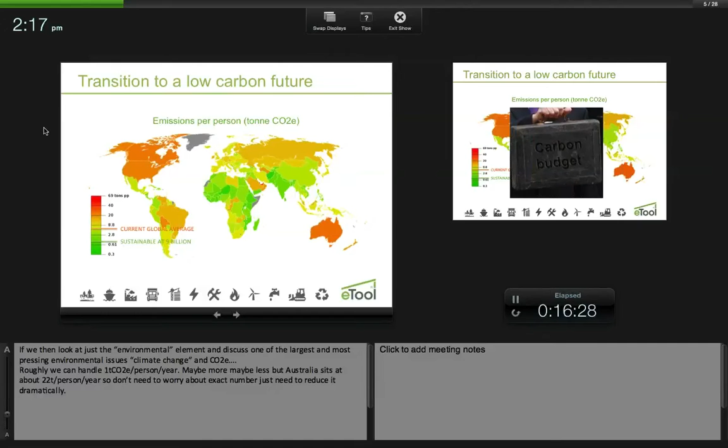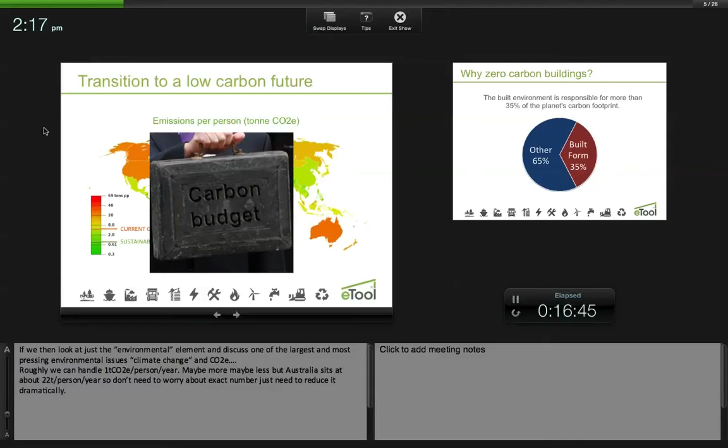So the biggest issue we've got at the moment is climate change, obviously the most important one - that's why eTool exists, and that's what we're trying to solve. We look at this global map of emissions per person per year, and we see Australia as one of the top emitters per person in the world, at around 20 to 25 tons. We need to bring it right down to at least 1 ton per person per year to achieve a sustainable level. That's a drastic change - there's a lot of things to change, and we have a budget. We have to be careful with what we are designing and how we're living our lives in general. But we need to find ways and metrics to quantify these things and make sure we are following that budget that we've got.

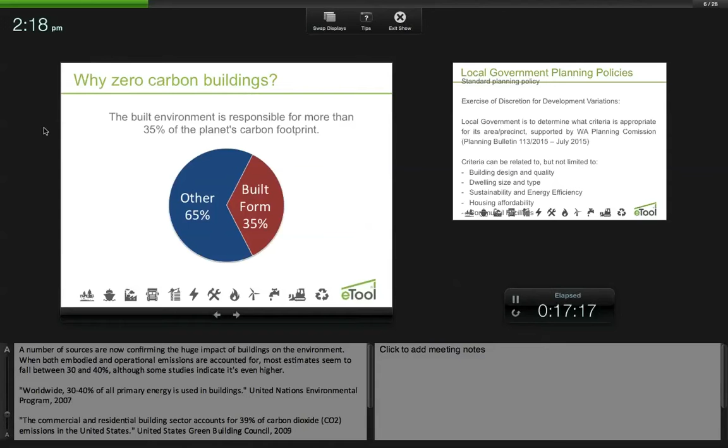And of course buildings are really important - that's why low carbon buildings, or even better, zero carbon buildings, are the way to go. Usually 35% of the impacts are associated with the built form. So there's a huge opportunity for us, as designers, as consultants, as planning officers, to help solve this issue.

Local governments have been using planning policies as part of a standard planning policy, as well as part of the exercise for variation to developments. So for example, City of Canning is looking at adopting life cycle methodology as part of their standard policy for development approvals. But they also have sustainability requirements when they're giving a density bonus, for example, when it's exercised for discretion of variation.

Apologies, this slide is out of format here, but there's a recent bulletin issued by the Planning Commission - I don't know if everyone saw it. It's just the WA Planning Commission supporting local governments to have their own policies and criteria to achieve good building design, and the criteria could vary from quality of the design, the type of the dwelling, sustainability and energy efficiency - one of the criteria, the focus we're talking about here today. So this is something that's happening a lot at the moment.

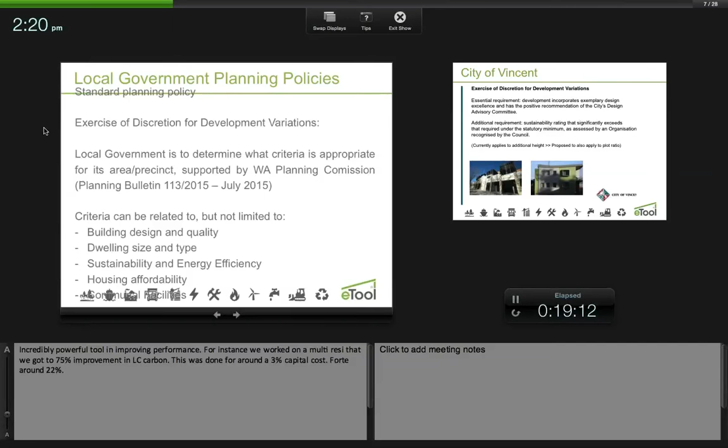So I use an example here from City of Vincent, from one of Anita's presentation slides. They mention a sustainability requirement to achieve the density bonus. A development going for an extra story or two will have to meet certain criteria in terms of different design principles, one of them being sustainability and design quality. City of Vincent requires that the design significantly exceeds the statutory minimum, and that's recognized by the council.

So each local government will have its own criteria and policies. They're also planning to expand it not only to additional height, but also to plot ratio. So it's something that's been working - they've been getting good outcomes with developers and with the community, so they're adopting that further.

Another example is the City of Melville for the Canning Bridge. The new structure plan is a notable area. They're requiring the multi-residential developments to achieve 6-star Green Star equivalent rating or equivalent. So it's very difficult - I don't think we have a 6-star residential building in Australia. We've got one 4-star in WA.

So it's something that the councils use - Green Star - because it's already a standard that's been out there. It works, but sometimes there's a lot of difficulties to implement that system, and developers will have barriers to achieve that compliance. So what we found is that the life cycle methodology has really suited that gap, or it's good support for this requirement.

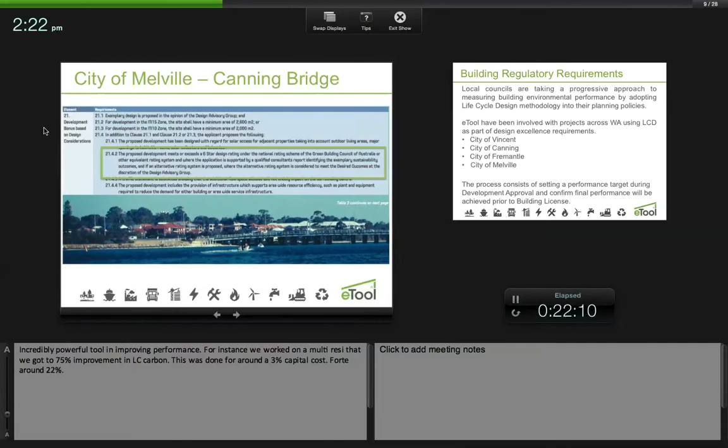Especially for example the City of Melville, we used life cycle methodology as part of the equivalency to Green Star. So it's one option that the council is looking at, but they have to understand how it works, how it compares. Are we really getting good buildings? How green is this building that we're proposing? So it's all part of that education process, and everyone is adopting more and more of this methodology.

The City of Vincent has been really progressive with adopting life cycle design methodology. They've used it on various - probably over 10 of their developments have been assessed through this methodology. It's not something proprietary from eTool, it's just a methodology. Any life cycle practitioner can conduct this assessment - that's the important thing about it as well.

So other councils have been looking at it as well - City of Canning, City of Fremantle and City of Melville. The process consists of setting a performance target right at the beginning of the project. Developers approach the life cycle assessment practitioner and say, we have a development here that's going for discretion or variation, and we need to prove this is a good building. Can you help us out? The earlier we get involved, the better, to set a target.

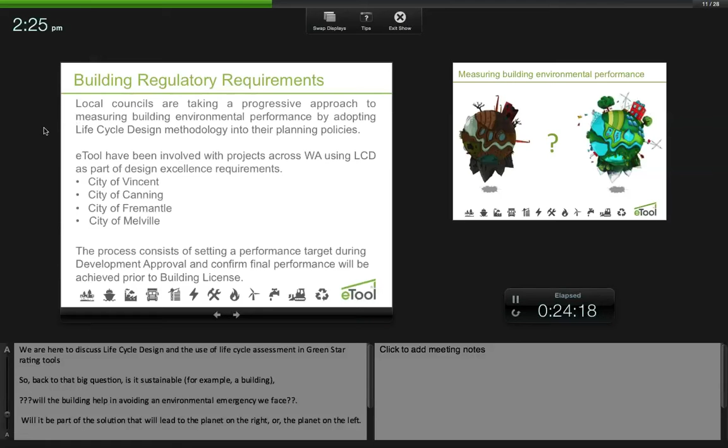Usually a council will have a target of what is a good building for them, how much they're expecting to save in terms of carbon emissions for that specific area. Is it totally, completely carbon neutral? That's what we hope, that's what we work for, but there are implications with that. So they'll set a target, for example, 60% better than the current benchmark. Once the council has defined that target, we'll then run a preliminary assessment and say how well this building rates, prior to DA, and then we'll work through the detailed design to make sure the building will achieve that target.

So that's the process. We'll look at the process in a bit more detail along the presentation.

Question - so you've gone through that process with those 4 councils. Have they all been relatively consistent in what they've deemed to be the equivalents? It varies - yeah, they all have different requirements depending on the region.

For example, the City of Vincent, they've set the target to be 50%, just one specific target. City of Canning, they will vary - it's still work in progress, it hasn't been defined yet. The City of Vincent is the one we have most work with, so the other ones are still work in progress. But it will vary depending on the region and depending on the criteria they have. It's a real learning experience.

Obviously we go in on behalf of - it might sound a bit wanky, but we go on behalf of the planet, so we're pushing the zero carbon outcomes. When we talk to a council, we're unashamedly saying, look, this is what we'd like you to do. The council says that's great, but the developer is going to walk away from building in this area if you push that hard - what's a reasonable figure to push for? Then you start bargaining to a certain degree. What we try to do is work on the developer side as well and say, look, this isn't about trying to hit that minimum target.

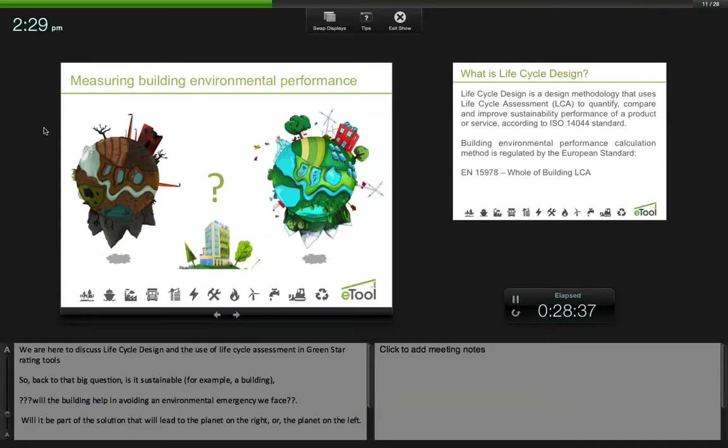It will depend on the specific situation, but we have metrics to quantify these things and look at how buildings perform, especially on environmental performance and looking at carbon. That's what we focus on here. We have other environmental indicators as well - when we run the assessments, you can look at different impact indicators like toxicity, land use, eutrophication, or depletion of the ozone layer. It's all these different indicators that we assess and look at. But the first one and the priority is always carbon from our point of view, and that seems to be the consensus as well.

The way we measure environmental sustainability of buildings is using life cycle assessment. Life cycle assessment is a methodology that will first quantify all the impacts, and then we compare - for buildings, we compare against a benchmark or NCC compliant building - and then we provide recommendations to improve. So it's always a three-stage process: quantify, compare, and improve. That methodology can be done for anything from a product to a service, but we apply it to buildings.

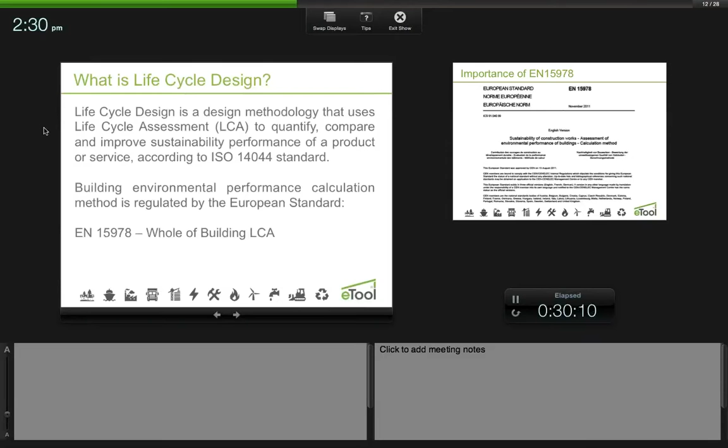Specifically in regards to buildings, there's a European standard - a calculation method for looking at a building, looking at the scope, setting the boundaries, defining the process, which is EN 15978. That's the really cool thing that exists, and it sets the whole guidelines for what a good building is. Fortunately, we developed a software that is compliant to that standard. It's not that we created anything - we're just providing a calculation method through the software following the EN 15978 standard.

I just thought it was important to mention this standard because it's an international collaboration of, I think, 28 European countries. So it's good technical know-how from people all over the world defining what sustainability of buildings is, and setting guidelines to help us as software developers, consultants, and designers apply this concept. You can see at the bottom all the member countries - it's a little small, but I thought it was important to give a bit of emphasis on the standard.

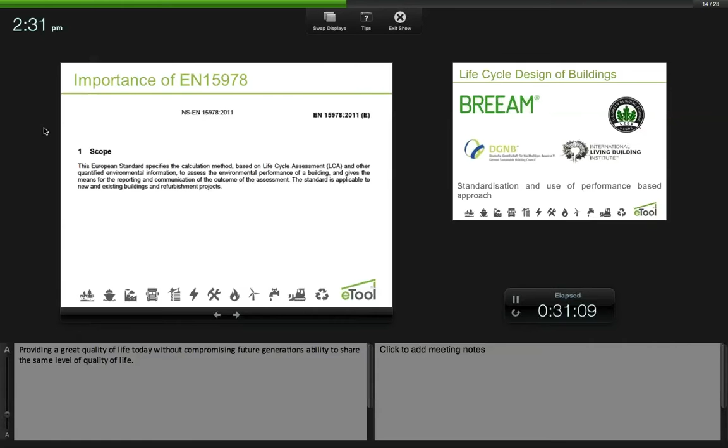The structure, the core of the standard, is to run a life cycle assessment. That's what it is - you have to run a life cycle assessment to find your results. And that is a very interesting process. I've been involved with it too, for the past 3 years, and I see a lot of this happening as I was working here, especially with Green Star.

When you have standards like this that set the guidelines, it's really helpful for rating schemes to incorporate these standards. Before we didn't have these standards, so it was good to have rating systems setting prescriptive methods, like you have to have this and that in order to get a good building, and they'll give you a formula where you have to comply with all those items.

But with the advance of the standards and the performance-based approach, we can set targets. We can look at what is the target in terms of carbon for this building. Is it zero carbon? What's the target for water use, for example? How many kiloliters per person per year? It doesn't matter what the design team does, as long as we reach that target. It gives a lot more flexibility to the design team, and the overall result is better.

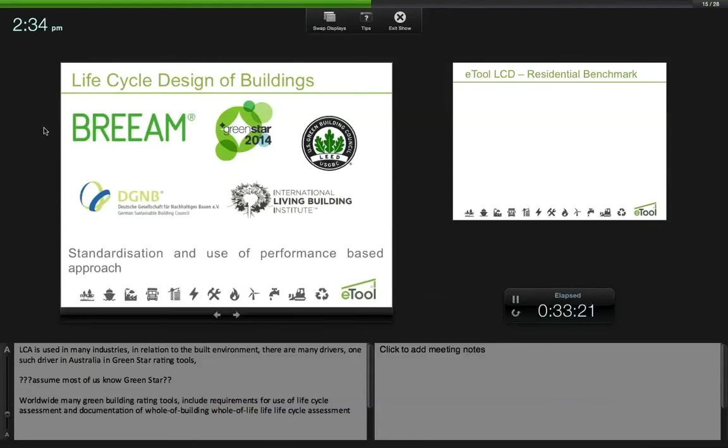So it's a progress that's happening - all the rating schemes are now incorporating life cycle design into their standards. Green Star now has a credit for running life cycle design as part of the certification process. Same with LEED, DGNB in Germany - the core of their rating system is a life cycle assessment. So all the materials credits, all the operational energy credits, all the functionality, everything just fits into the LCA, and that's how they rate the buildings. I think we'll see that happening within the other rating schemes as well.

I thought I'd quickly jump through the software here to show you how I go with this, just to show what the software does. The software is online, so it's on the internet, it's open use. If you're using it for education purpose or research, you don't have to pay. So it's really useful for running preliminary reviews on projects, and if you do have a commercial intention with the results, then it goes through eTool services and certification. But I thought I'll quickly show you the benchmark.

So when we run, for example, a residential building, the local council, we compare that to the benchmark, which is an NCC compliant building with current technologies - the system efficiencies for air conditioning, lighting, all that feeds into the benchmark. And this is the number here: we're looking at 4,220 kilograms per person per year. I know this is a bit abstract, hard to imagine - is 4,000 kilograms of carbon a lot? But I think it's important for us to start getting those numbers and a feel for those numbers, because that's what we are comparing against. So when we say 50% better than the benchmark, we're talking about 2,000 kilograms per occupant per year.

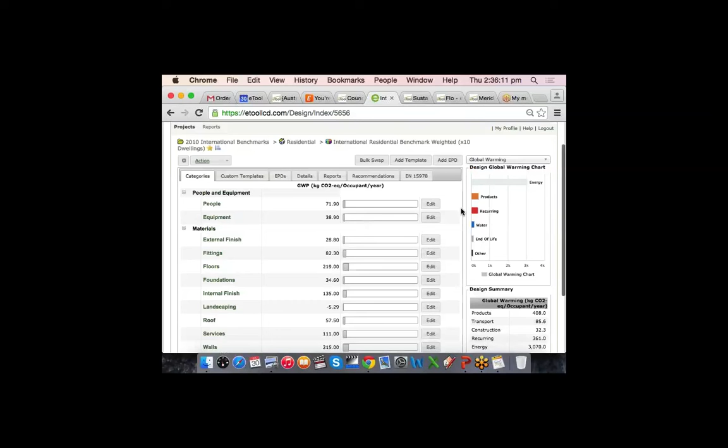So this is where we look at where the impacts are. You can see there's a summary chart here showing the majority of the impacts are on energy use. Of course, here in Australia, because we're on such a carbon intensive grid, 70 to 75% of the impacts are associated with operational energy. But we do have a lot of impacts associated with products, the recurring impacts, some other impacts with water, end of life. So when we want to start improving these buildings, we know where to focus, and that's the idea with the tool.

This is EN 15978 format and scope. Because we're running the video conference, the software is a little slow since it runs online, but here you can see how it breaks it down into different stages, from materials to use. Materials - you go from product to transportation and construction, use or the operational use of that building, end of life - what happens when that building gets demolished - and also benefits beyond the building boundaries. So this is what the software produces, following the international standards that I mentioned before.

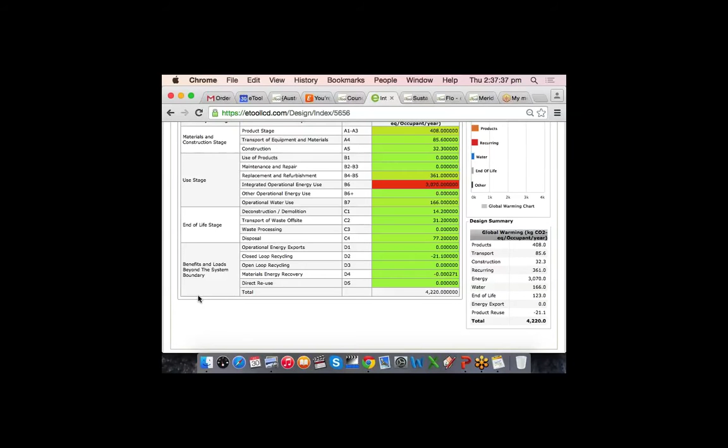I won't spend too much time on the software because I don't want to get too boring. I know it's only us that run the software that likes it - not everyone likes getting into the details - but I thought it was important just to show everyone how it looks.

So yeah, the methodology will look at two main components, which is the life cycle impacts, looking at all the stages of a building, from materials to transportation, construction, use, maintenance, and end of life. But very important, and most important, the functionality.

That's where we focus all the attention, because that's where we get the biggest benefits, is increasing functionality of buildings. There's no point of us building a sustainable mansion that only 2 people live in. Same for an office building. If we get a really good office building, but it's not providing enough space for people to work at, there's no point. So that's where functionality comes in, and it's applicable to any type of buildings. We're talking mainly about residential here because that's where we've been working with local governments, but it can be replicated to different building types.

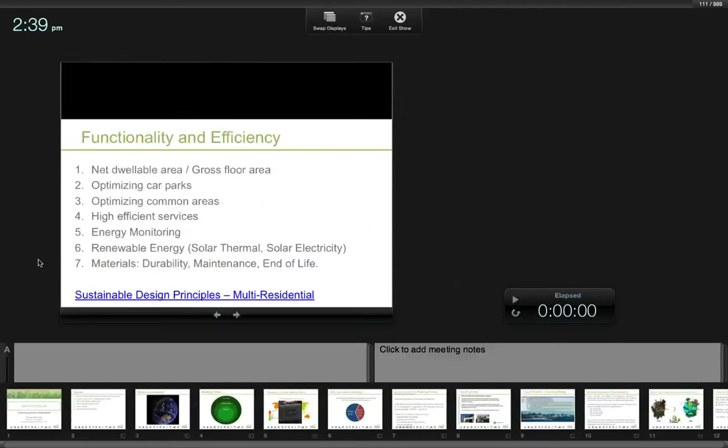In regards to functionality, for example, we look at metrics. What is the net dwellable area compared to the gross floor area? If we have an apartment building that has a lot of common area, a lot of car park, and not a lot of habitable area, it's not a really good design, is it? Because we have a lot of energy to maintain car parks and corridors and entries and all that. So we need to find ways to optimize that.

That's optimizing functionality. Examples, like I said, reducing car parks, or even optimizing, getting the same number of car bays in a smaller space using stackers, or using diagonal parking, and optimizing common areas, splitting. Maybe sometimes you get 2 sets of stairs instead of 1 long corridor, and then you get more dwellable area. So you end up increasing the sales value of a project as well.

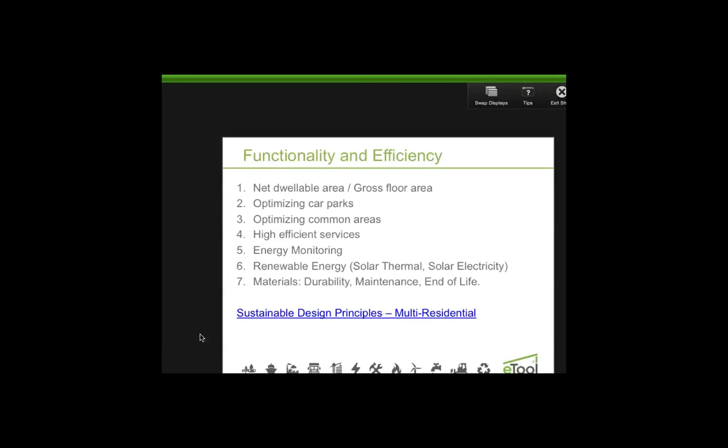Not always does increasing functionality increase costs. Most of the time, increasing functionality will reduce costs. How can we optimize the structure of a building, and reduce the thickness of a slab, for example, changing the columns and all that, reducing the amount of cement and concrete. So therefore, optimizing the performance per occupant per year. It's all to do with increasing functionality and efficiency.

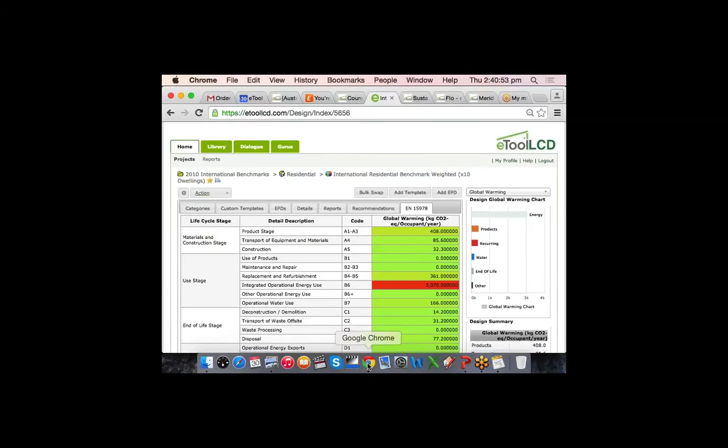There's a really interesting document on our website that I'll quickly show you, but I won't spend too much time on it because it's long, but I think it's important to mention. If you have some interest, just jump on the website and look for it. It's basic guidelines for multi-residential buildings. We put this together after looking at so many buildings, and they all have similar basic concepts that are applicable to every building.

So the idea is tons of CO2 emissions per occupant per year. Like I said, the base design is around 4 tons, so 4,000 kilograms. How can we bring 4,000 kilograms to zero? What do we need to do, what are the basic elements? Here we have a combination of increasing functionality, picking the low-hanging fruits first, but also using some renewables and some increase in efficiencies on systems and stuff.

Just quickly show you, for example, some initiatives and what impacts they have. Hot water usually will have a large impact on multi-residential developments. Sometimes a lot of focus is on thermal performance, cross-flow ventilation, orientation, insulation. It's important to get good thermal comfort, but because we already have the 6-star minimum requirement for thermal performance, there are other areas even more important to look at. You see that hot water will get us 25-30% savings. If we improve lighting, there's a good opportunity for lighting automation with sensors, lux sensors, timing controls, and so on.

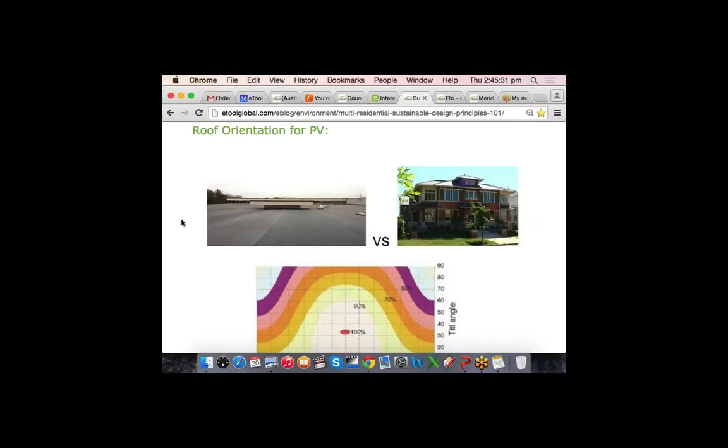This is worth having a look at, it talks a lot about increasing functionality—how can you design your building for optimum PV, design your roof for optimum PV installation. It goes into the functionality we talked about. For example, the ratio we mentioned: if we increase the ratio of dwellable area to gross floor area from 45% to 80%, you're already achieving a 14% improvement on your building. You're not changing to low carbon materials or LED lighting, you're just improving functionality through good design, good architecture, good quality design.

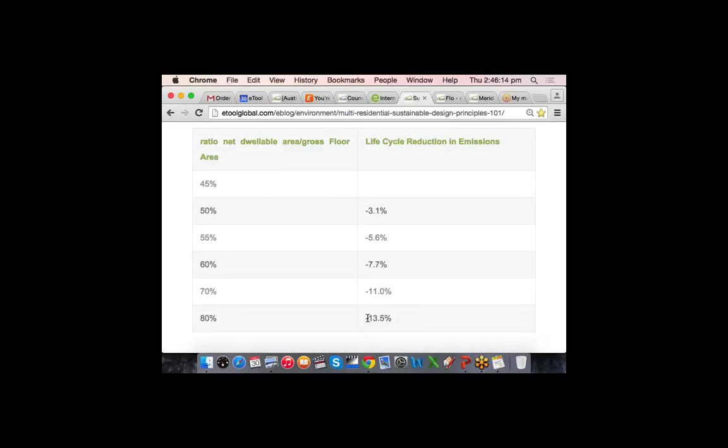That's something I was about to mention—car parks. It's something that surprises a lot of developers when you say let's look at car park design, because they expect you to talk about recycled materials and orientation. The first thing we do is look at functionality, and as Nikki's pointed out, you often look at a car park and wonder who designed this thing. Unfortunately no one really focuses on the car park because it's not particularly visual or exciting to optimise, but there's super low-hanging fruit in sorting out car park efficiency—from construction costs and materials through to venting and lighting. If you do some innovative stuff there, you can get huge savings. It never shows up in the green rating systems that you've made your car park design more efficient, but it definitely shows up in the life cycle design. In fact, it's one of the first things we look at.

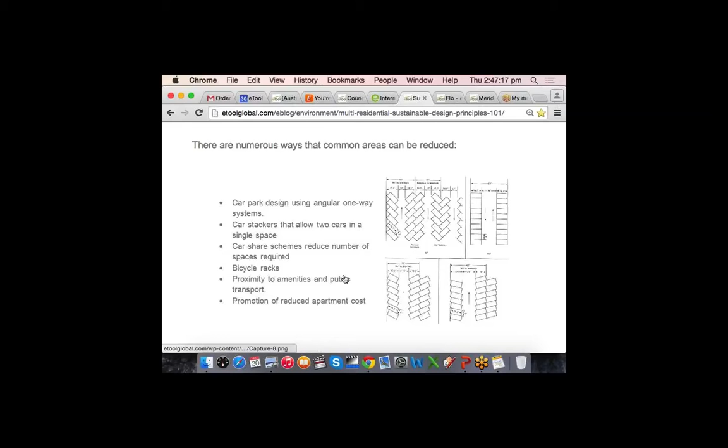Just thought it was worth mentioning these guidelines. Just jumping back on the presentation here.

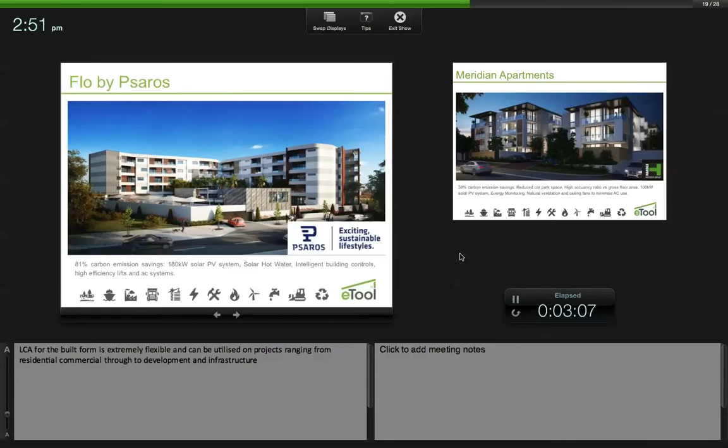So councils really like it because it drives that community awareness, and it usually gets at least 10% savings on the energy use. So it's all about putting those systems in place, and then the occupants will flow with the environment that they are living in.

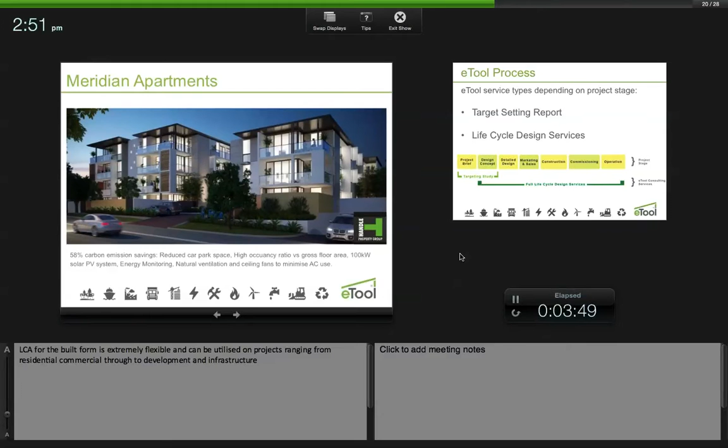This is another one, from Handle Property Group. Interesting that this was 1 car bay per apartment. So it's again optimization of common use, using the roof space again for PV, minimizing AC use with natural ventilation and fans. Fans seem to be something from the past nowadays - we don't see them much on designs anymore, but they're great, especially here in Perth. So it's good to see designs including fans, so thought I would mention that as well.

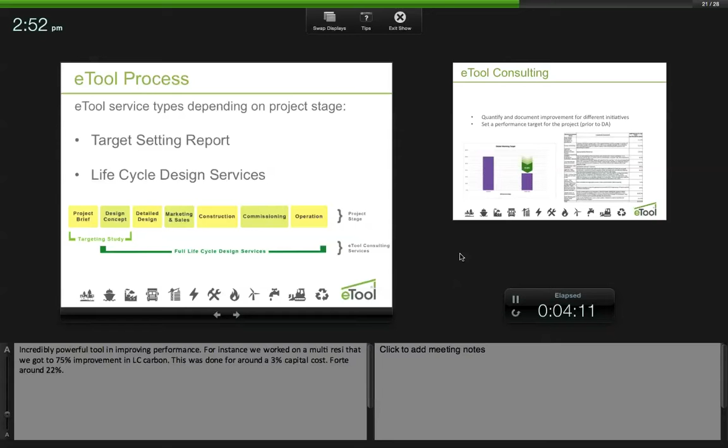So just now going back into the process, what happens? How does it work when we get, let's say, working with the City of Fremantle, on a multi-residential development that is trying to achieve the design excellence. How does it work? What's the process?

So there's 2 different services eTool provides depending on the project stage. The idea is to reduce the cost for the developer when they're not sure if the project is going ahead. Prior to DA, they don't know if it's going to go through or what the sales will be like. So we run this target setting report, which is a preliminary assessment looking at how the building performs, pointing out where the impacts are, helping them focus on where the biggest impacts are, and setting a target that will suffice the requirement for the council. So that's what's done at the concept stage, the target setting.

Once it's approved, it moves into the detailed design process. We'll run the full life cycle analysis - that's when we go into the plans. We'll look at all the areas, the materials, all the system efficiencies, air conditioning, lighting, everything, and then we'll quantify the end result and compare it to that target.

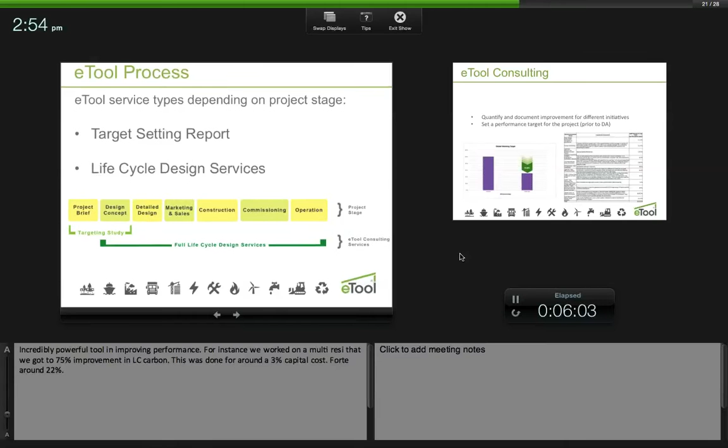So let's say we achieve a target of 60%. If the design changes along the process, it doesn't matter what they do - if they change the hot water system, or the functionality, or pull something out, or instead of the setback they put more units in but get more roof space - it doesn't matter what they do as long as they achieve that final target. That gives the design team some flexibility to improve the design, change things as it always happens, but also maintain the performance.

So it's just one example of the target setting report. It's really small to see, but this is just one of the formats. This is a benchmark, residential benchmark, and this is the proposed building, the base design. So it's 56% better than the benchmark.

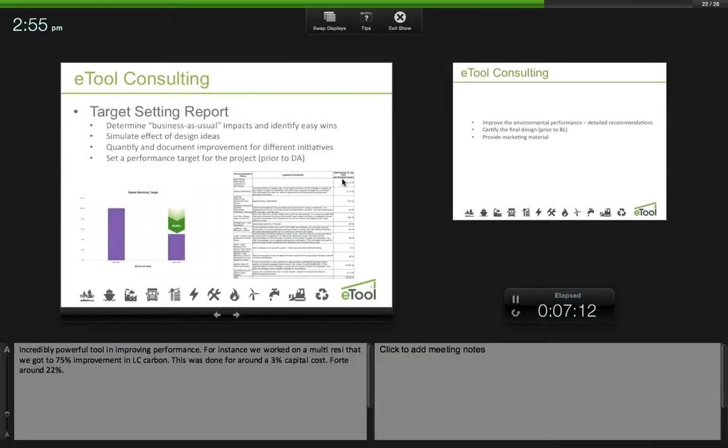And in order to achieve this performance, there's a list of recommendations, and each recommendation will have a percentage improvement. So sometimes if you change your hot water system, we'll give you 10% improvement. If you increase your thermal performance from 6 to 7 stars, we'll give you 1 or 2% improvement. Or if you increase your solar PV, we'll give you 15% improvement. So for the developer, it's really important for them to see, okay, I want to spend $500,000 extra on this project - where will I get the best benefit for the planet? So it helps them prioritize where the impacts are and where the best savings will come from.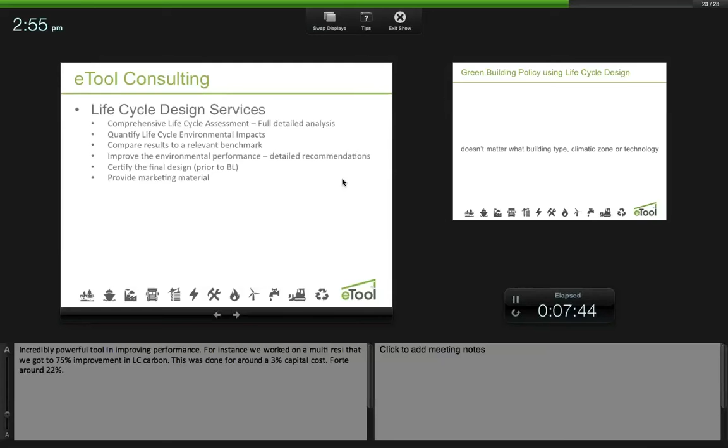Then we'll move on to the full life cycle assessment, which is a very detailed analysis. That's when you can use the results to promote for sales, for your sales campaign and marketing, because we already know it's all locked in. You can still run the assessment during the design process, but after it's completed, we issue the certificate, then that's what's been designed.

And why, when talking to local governments, has this methodology been accepted, why do they like it? There are different elements, and one of them is, I think, because it's an international standard regulated by a group of technical people, it's always improving. The international standards are always being updated. So when you rely on that framework, your policy is always constantly going to get updates and maintain the quality and relevancy. So that's one of the reasons why it's easy - when you have to communicate the target, you just set the target. It's easy to communicate internally, also to the community, to the developers.

Because it's performance-based and technology agnostic, it doesn't matter what building type you're using or what climatic zone. You can just adjust the target and use the methodology depending on the application. It's very flexible, and due to that flexibility and the performance-based approach, it creates more opportunities for the design team to achieve the outcome, usually resulting in better environmental outcomes at a lower cost.

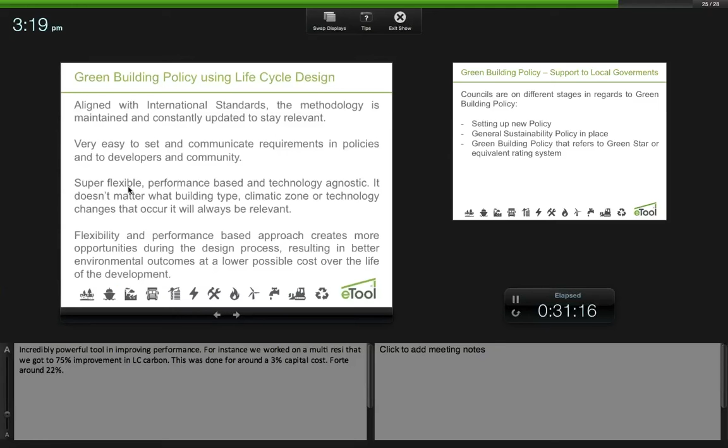There might be two parts to that. One is the limitations of life cycle design - yeah, we can't do social sustainability. And when we work with a local council, they don't just look at this and say, yeah, you get two stories, they'll look at the overall performance of the building. But I think we have to be very careful when we talk about sustainability in the pure sense of environmental, social and economic.

If you want to talk social sustainability, you need the architects and urban planners to have that conversation. Don't let the engineer or a tick box say 'this is sustainable because it points the right way' or 'it's got some barbecues' - because that's not sustainability either. I agree, it totally takes both.

Whenever we have discussions with local government, we say, here's the numbers - if everyone lived like this on the planet, will the planet be destroyed? Yes or no? Okay cool, tick that box. Now let's look at the social sustainability side of it. We can't do that - we're engineers, we're happy to admit that. So totally agree.

What are some of the other things they can do? St Vincent came up with a few clever things, like builder's profile - give them a bit of marketing value, a bit of time in the media as a result of creating a good building. But it's challenging. You can maybe cut red tape, but that's fraught with issues, especially when you're already running a tough budget, and locally you can't just say 'do this and we'll give you money off.' So it'd be good to find out if you had other ideas.

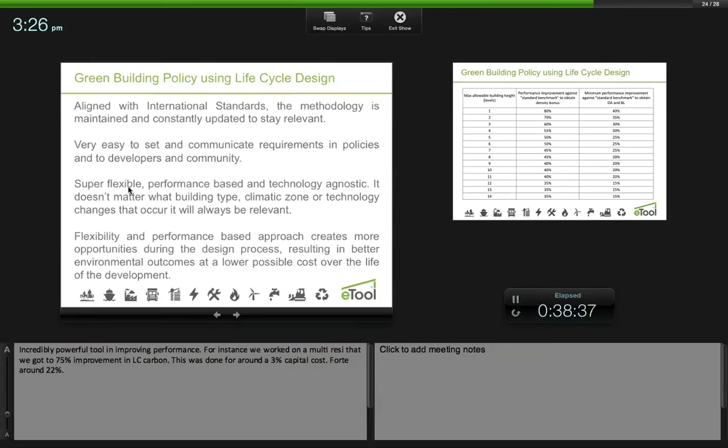What we found out is that councils are at different stages, depending on how they're structuring the policy and looking at what we're discussing here — how far can we go, what are the incentives. Some councils already have policies in place and are revising and improving them. So it's a work in progress, a constant improvement.

That's what we're finding: opportunities for us as designers to influence those policies. They are changing, and they're open to hear — that's what we've discovered. We've always been welcome to go there and talk to them and show what we think would be good building design.

That's just to highlight what eTool have been doing. We always approach the council prior to proposing using the methodology, but that's the idea — not only saying this is right, but hearing from them, from their local experience, what is good from their point of view, looking at environmental sustainability but also considering social sustainability and all the other criteria.

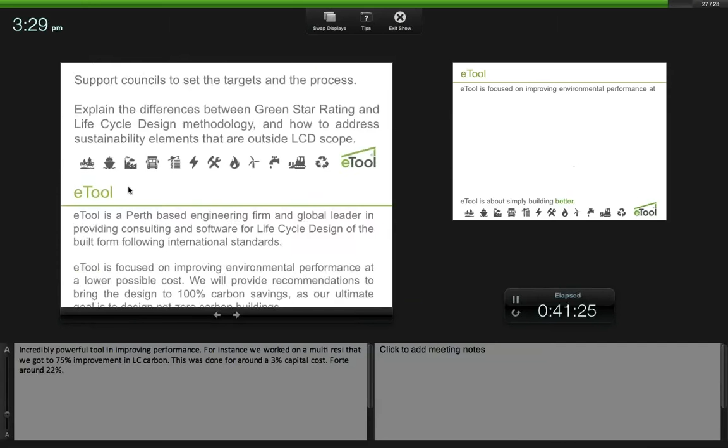For those who haven't heard about eTool before, it's connected online. I think everyone here knows what we do — we're a consulting firm doing engineering and software for the environmental cause, and we've been doing this for almost 5 years now, since 2010. We've completed over 200 LCA studies on the built form, and we always push for zero carbon buildings. That's our mission, that's what we thrive on.